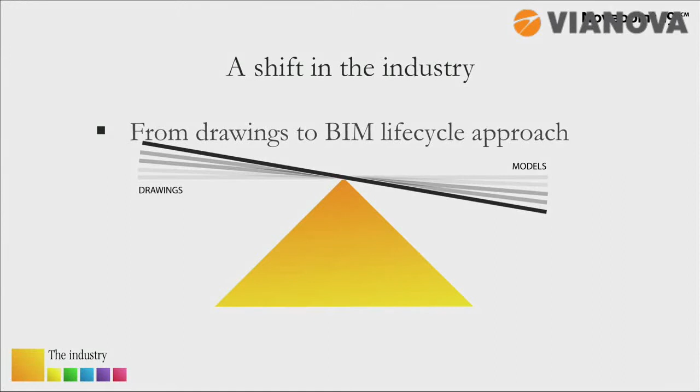Focus has been on 3D, but in a few cases also cost and time. The trend now is that clients start to ask for more models in a life cycle perspective. They want more information at object level. So, changes in the client procurement.

It's also very interesting to see that the client asks for models. More projects are now mainly delivered by models. This implies an increase in the need to support the BIM models. We have to find out who has done what, when, for example.

We also see that, now and in the future, open formats will be required from the clients. For some domains, we already see it.

Collaboration between stakeholders, we think that is a key factor now to have a shift in the industry. We have seen that we have it between domains, we have it between phases, and we even have it between stakeholders in the life cycle. We even see it between road and rail administration, and we find it very interesting.

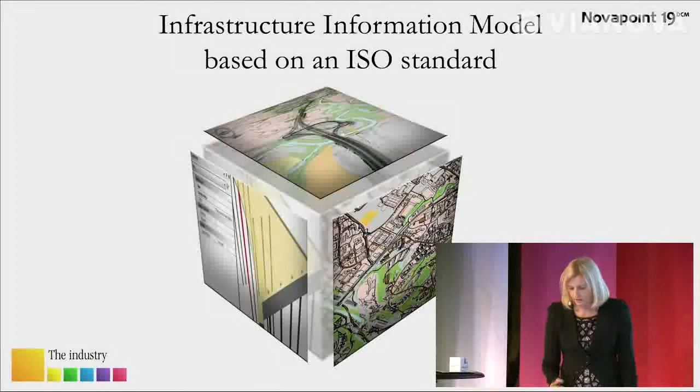If we first take the map and the GIS information, we can, for example, handle area information. If we continue with the terrain, the model can have much more detailed information about, e.g., the existing situation under and over the ground.

Then we have design information, and we have information around that. We have roads and structures with a level of detail that is ready for construction, with very good quality.

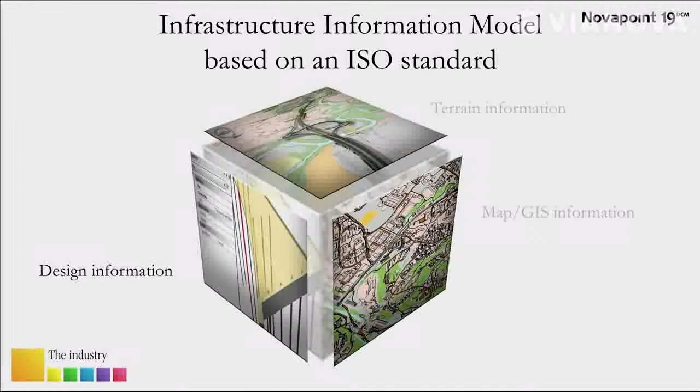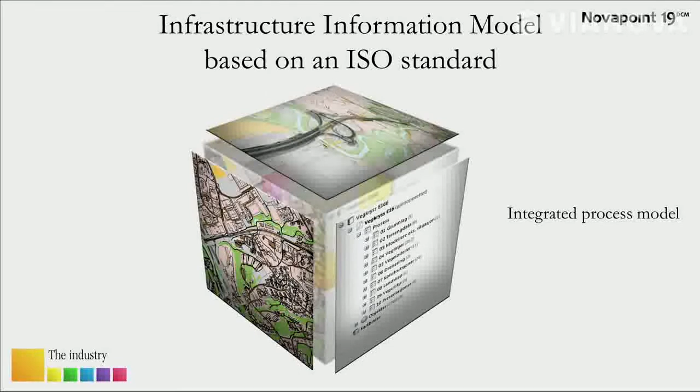So, in the end, we now have support for an integrated process model inside the solution. We can take care of planning, we can maintain, and we can quality assure the work processes. We think that is maybe the most unique part of our solution.

So, over to the product. We will guide you through the essential parts of the product.

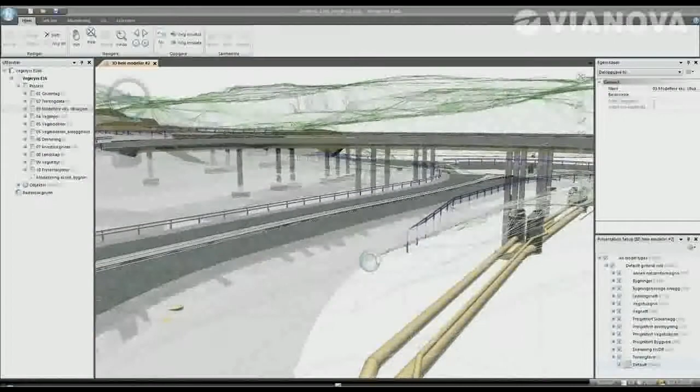With Novapoint 19, we have moved the work tasks into the common information model. That's quite a big change, a big step. Like this example from E16 in Sandvika, which has been worked on for a while, we can see that the task model up to the left has actually documented every change done to the model and how each object was created. Like this road, for instance, how was it calculated or imported?

When you start a new project, you will typically select from some templates. Here we select a standard of the process code in Norway, and then it establishes the task tree for you, which will, after that, record all you do with the model.

A big new thing is handling the CRS through the whole system, from beginning to end. You typically start up with one of the templates we have in the system. We support all the UTM, NTM, SWEREF, etc. So you set the CRS for the system.

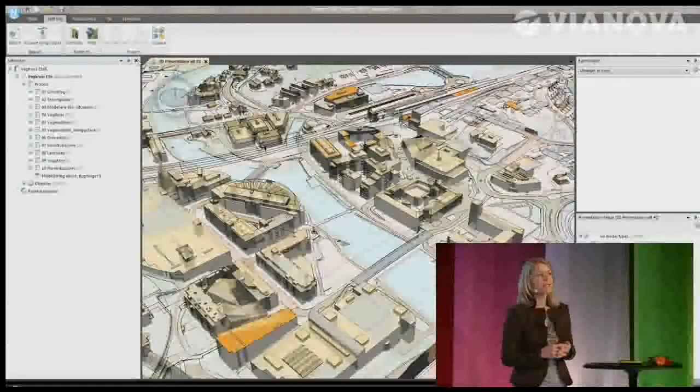When you enter a model, you can always go into the general property view and see what CRS is active in your model. We also have a validation during import of a file: is the file the same CRS as the model or not? If it's not, select from a transformation library.

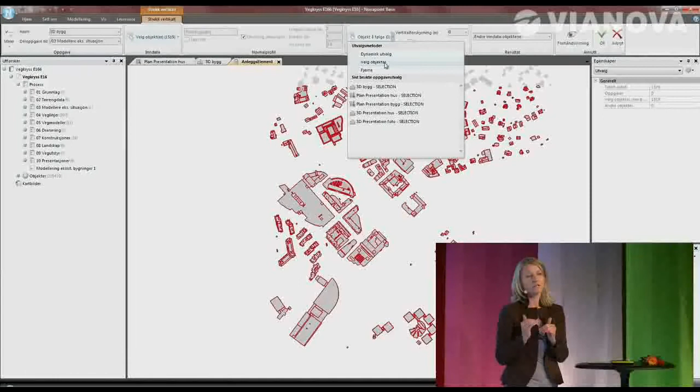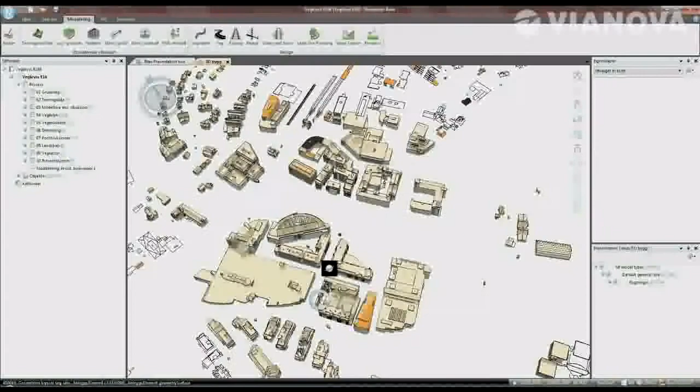Existing infrastructure: we get a lot of our information in the beginning from maps today. Here we have imported a map with some buildings, but we want the buildings raised to 3D. So I select a set of buildings, and I select to which level or surface I want them extruded. Then the system calculates a volume for all the selected trees and houses. Because of the quality of the map file, you see it's quite a good recognition of where you are, so it's a good start when you start designing in a city, for instance. It's only based on map data.

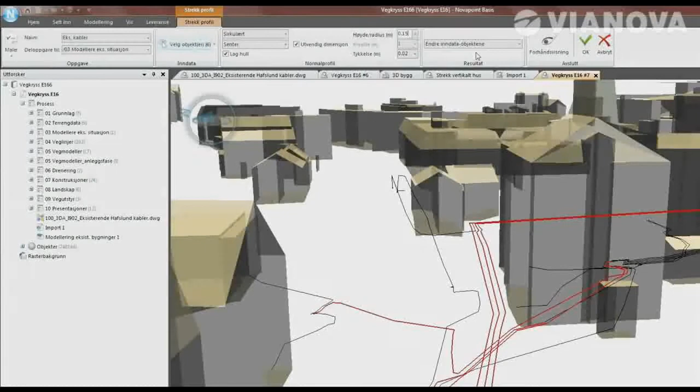You always get a lot of existing infrastructure as only lines or points. Here we want to extrude a cable pipe around a cable that is only a line. So I select a set of cables from my integrated 3D view. I see them get selected, they're red, so I know I have the correct objects. Then I select a shape for the extrude - circular, square, dimension, diameter, and so on. The volume is then calculated and extruded and stored to the model for all these cables.

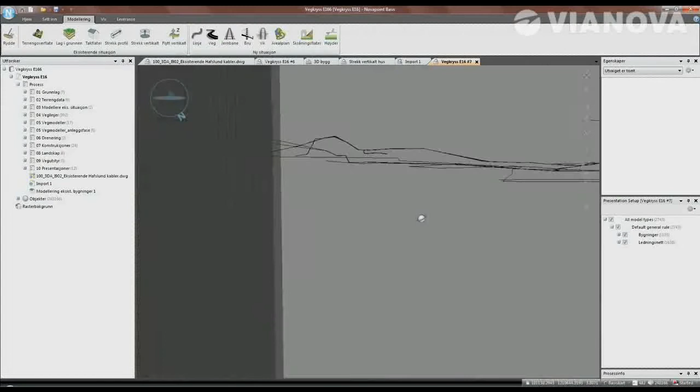Here I selected some cables, but I could have selected the object cable for the whole model and then run extrude just once as one task for the whole model.

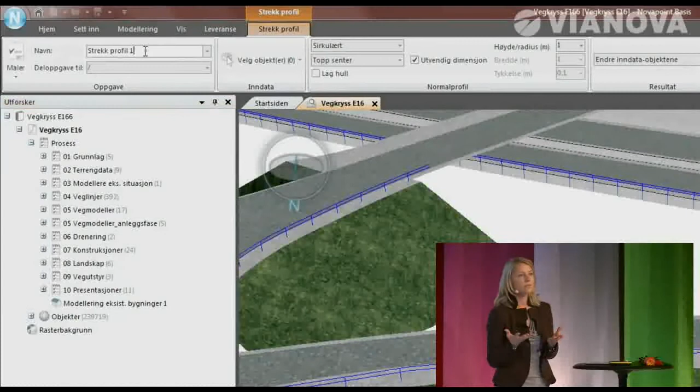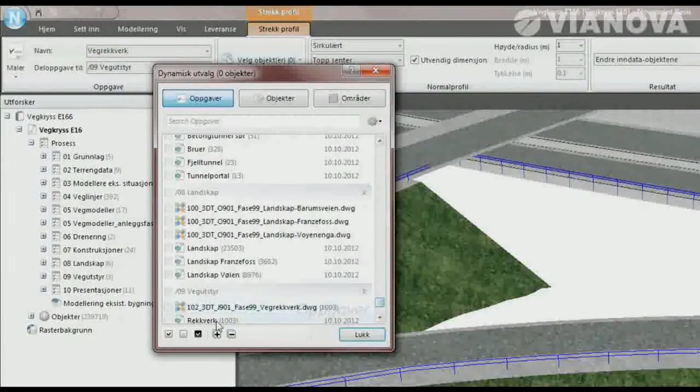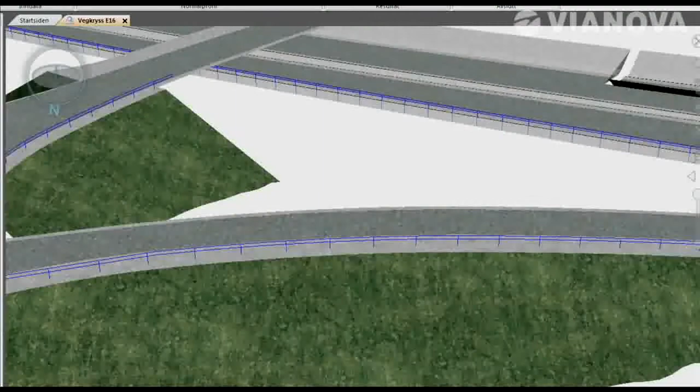Another example: maybe you get design data from someone else only as lines, and you want them as volumes too. Here we have a set of safety barriers which came in with an import from a DWG. So now I use a selection based on the import task. When I select that, I see the safety barriers marked red in the model - correct objects. Once again, I select the shape for the extrude, the dimension, if I want it massive or as a pipe or a hole. Then the volume is created and stored to the model, giving a better view of the end result.

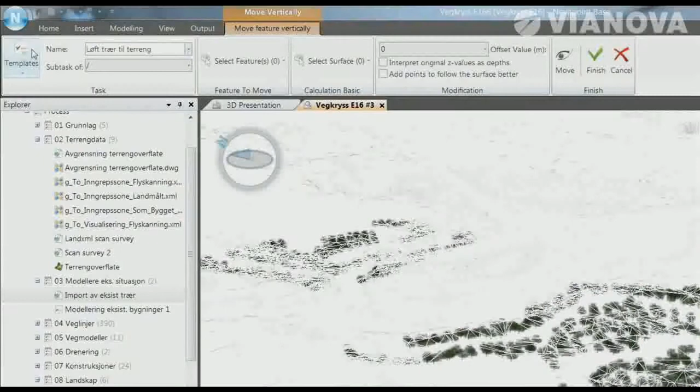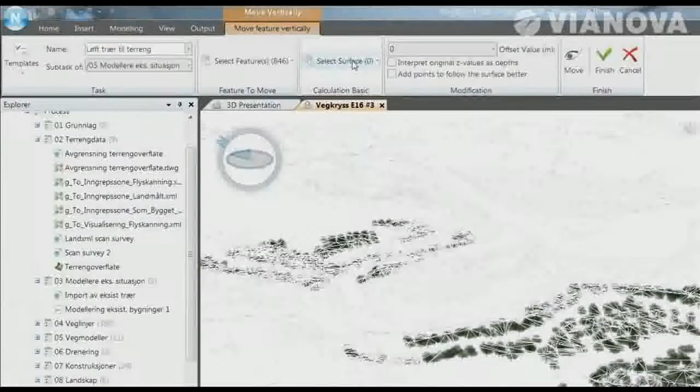Another typical situation is having a lot of 2D information, 2D points, and wanting them to get a Z value. Here we have a set of trees that should be kept through the whole construction phase, so I want them visible in my information model. I select the actual trees using the task selection again, and tell the system - you see them get marked red, you're in control. I say to which surface or level I want to raise these, selecting the top terrain surface, natural, with an offset of 0, and the trees are moved up to the terrain top surface, so they get a Z value.

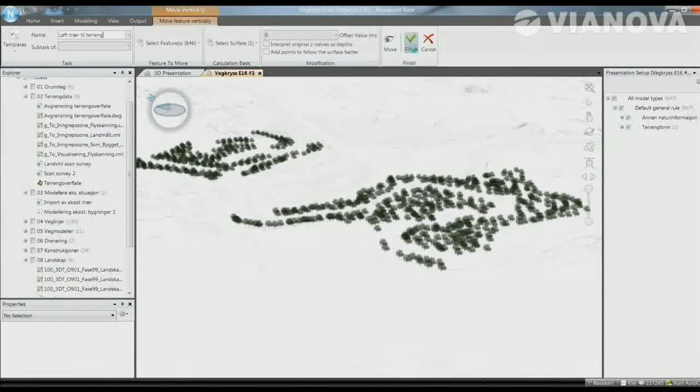You can always go and control this afterwards in the integrated 3D window, and it seems like they ended up where they're supposed to.

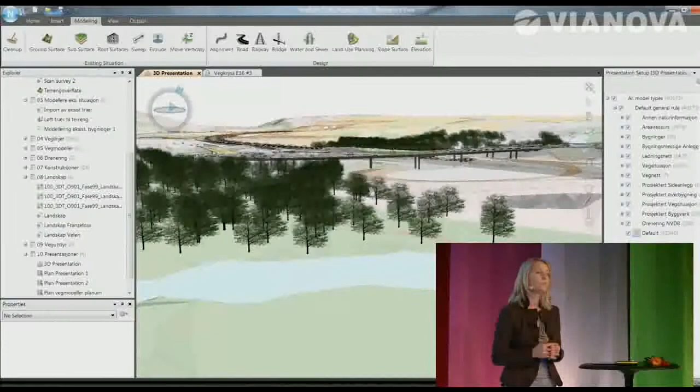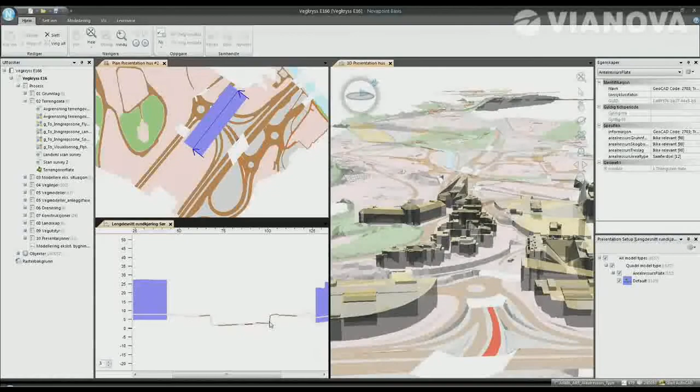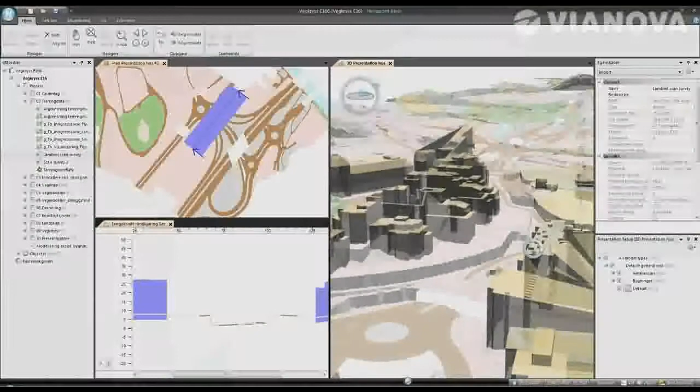We have multiple ways of adding terrain to the model. Here we have imported a land XML TIN file, but with land cover use. When you click on the different areas in the cross-section window, you see they get selected also in the other dynamic views, and all the information about the area is in the property view. So they all came in - all the information came in during import and was stored to the object. Together with the 3D buildings and the terrain with area information, it's a good recognition, a good start to go on for your further design.

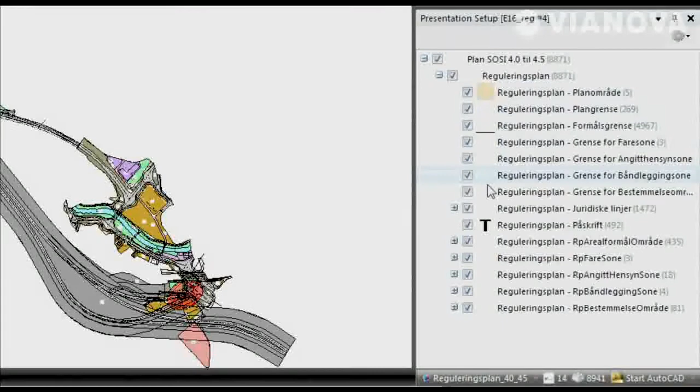Novapoint land use planning now stores data directly to the information model. That means the land use information is available for all other domains, all other users of the information model through the whole project. They could always go and click on an area and get all the information about the land use up in the general property window.

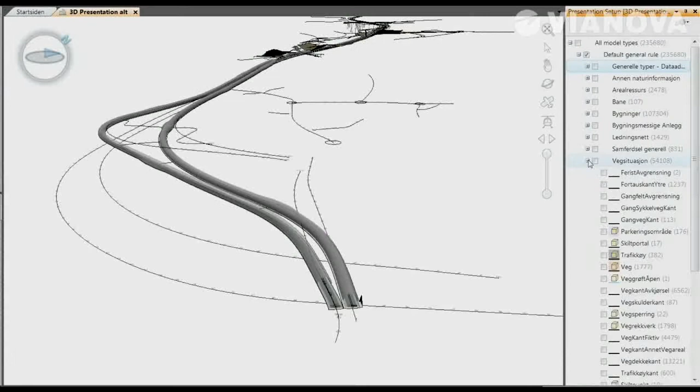To summarize: all this GIS, all these tools to enrich existing infrastructure models gives a head start for the designer to go on with his further design. Like this example from E16 Sandvika, where the road designer has just started on his actual road design.

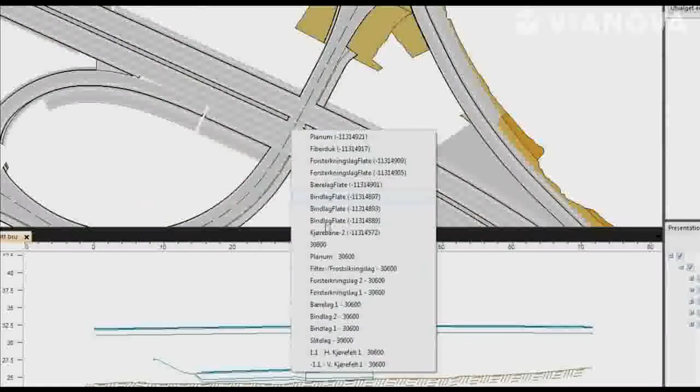A typical object that changes a lot in the beginning is the alignment. You could always click on an alignment and get all the geometric information. All the parameters are available inside the property view.

If you want to go and make changes to the geometry of the alignment, you do that in the same windows as earlier, same dialogues. You enter new parameters and the preview shows the changes so you see how the alignment becomes.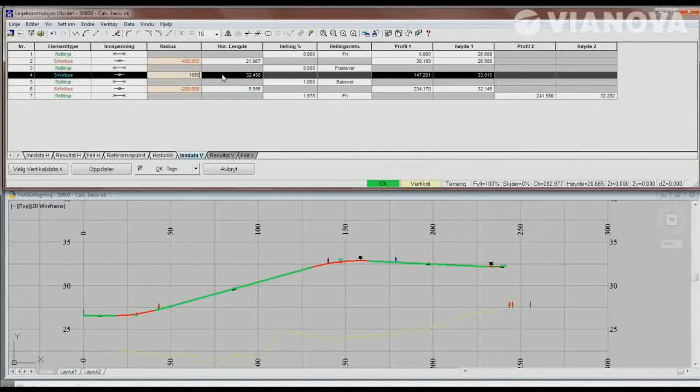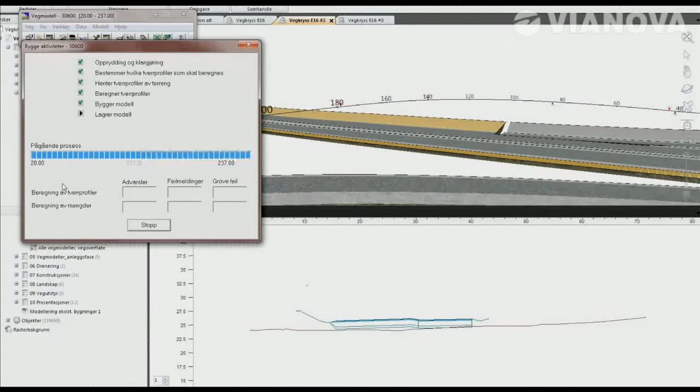The big difference is maybe that the calculated line is instantly stored and shown in all the dynamic views inside Novapoint. So now the alignment is a bit underneath the road, so I want to go and recalculate the road model. The recalculation then removes the former stored road and automatically stores the new calculated road to the model, so that you see it updated at once.

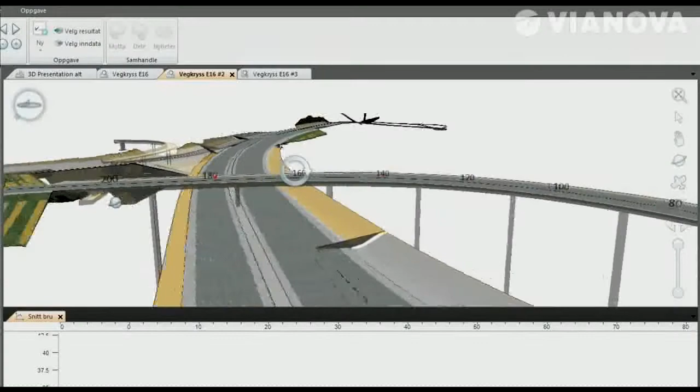Then it's easy to go and look at some different domains like bridge, piles, etc. in the area to see if there are any conflicts or if the bridge and the road fit well together. You also see the section numbering in the 3D window that gives you an overview of where you are.

Then to the Quadri Cloud. Now you are in charge of your model data. You can share it with any other user of the information model at any time, and you could download all the other ones' data.

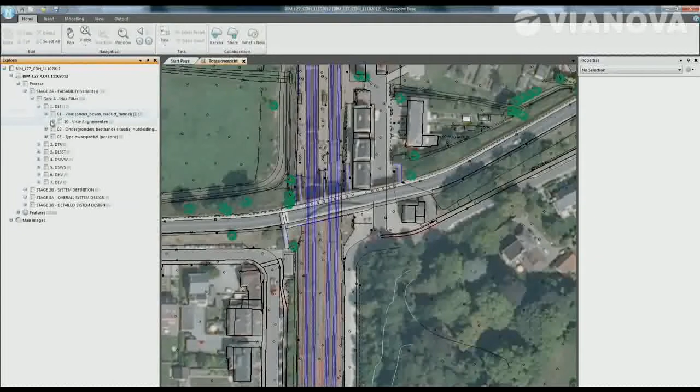Here, my colleague in Belgium is doing some changes on his railway. He wants to share that with me, so he hits the share button on the Quadri Cloud. He writes a small description of what changes, which object he has made changes on.

That is practical because you also have a button in the Quadri Cloud that says, what's new? So everyone of you could click the what's new button during your day and see if some of your colleagues have done changes to the model that you need for your further calculation.

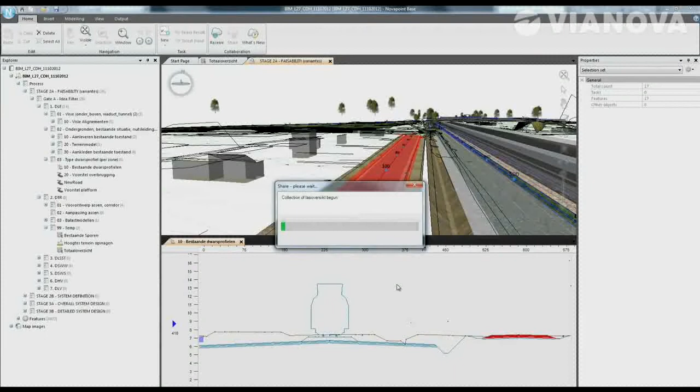So then you will get a list of all the changes, and you can choose to download if it's necessary for you, or you could wait till there are updates that you are dependent on. Now I log into the server back home, the same model server. I choose the same project, and I choose to download the whole project from Quadri Cloud.

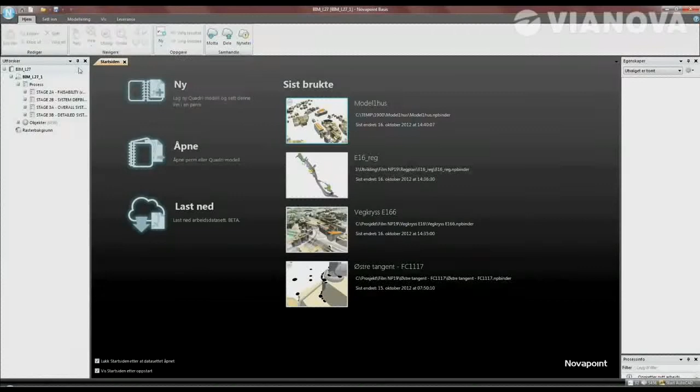I will see then that I get the exact same model as he has. I could have selected only some of the objects if I just needed some of them, but now I took all of it. And here we see the same task model as he had up to the left.

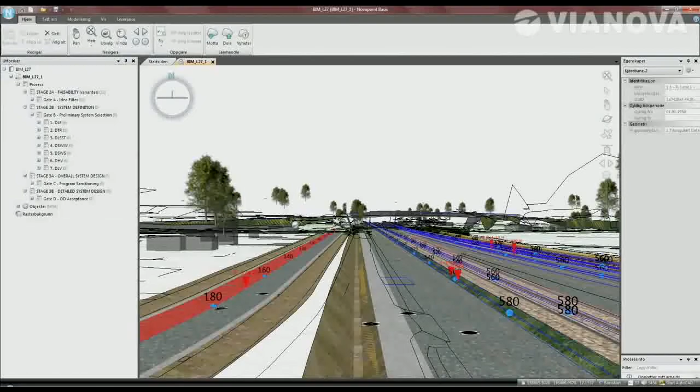This is maybe one of the biggest benefits with the task model, because it gives a great overview of what all of your other colleagues have done of changes to the common information model, because it documents every change. So it's a good way of following up the project, the common project.

If I want to do changes here, I can do changes, hit the share button, and then it's updated for my colleague in Belgium.

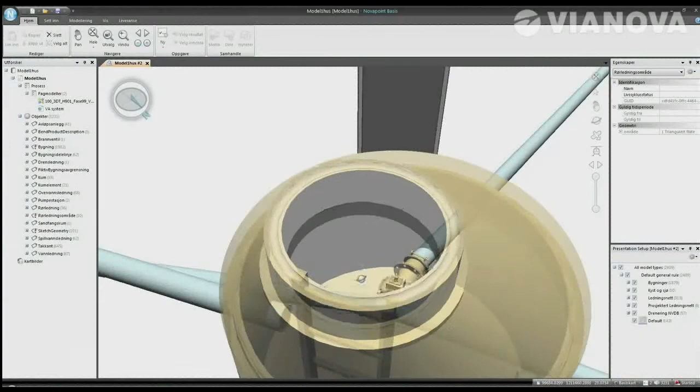It's important to be able to get information into the model. You create objects and you add intelligence on the way in.

Like this manhole imported from the Novapoint Water and Sewer Library, it is now divided into different objects. The dividing of them into objects is done during the conversion of the file when you import it.

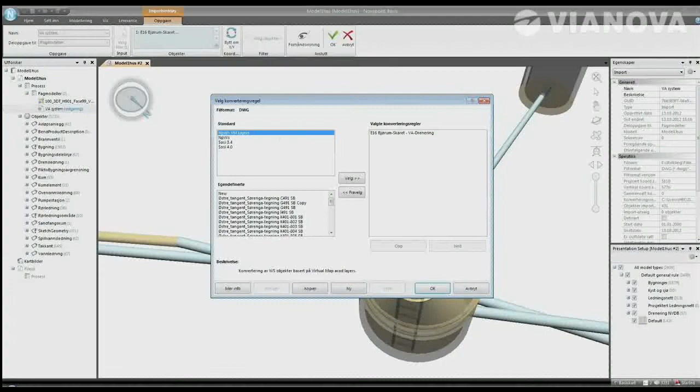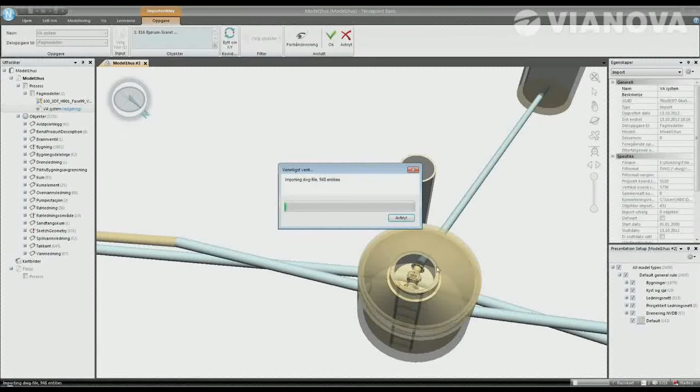Here is a conversion file based on import from DWG. So I have mapped from a layer name in DWG until a given object inside Novapoint. But you could actually also map from a given layer name to the object manhole with the property value concrete on material. So it's not just to an object, but to an object with more information.

And then it's data out from the system. You could, of course, always draw all your views in the model to AutoCAD, for instance with standard map drawing rules, as you used to today. You can select from the different windows you have defined inside the model from the standard Novapoint menu.

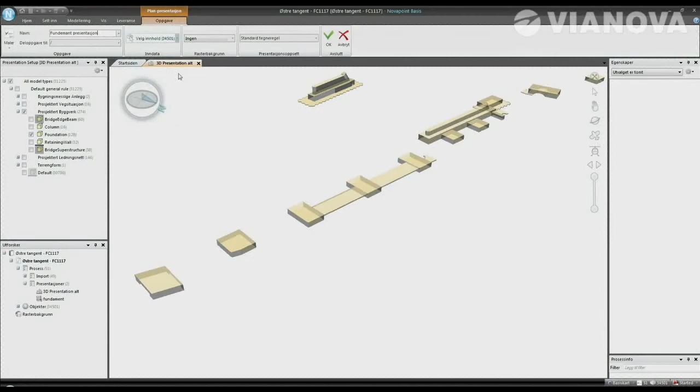You could also easily isolate which objects you want to have in one separate drawing, so you don't have to remember which file the object came from. You just select objects, like here, fundaments, from the general model, and export it to DWG.

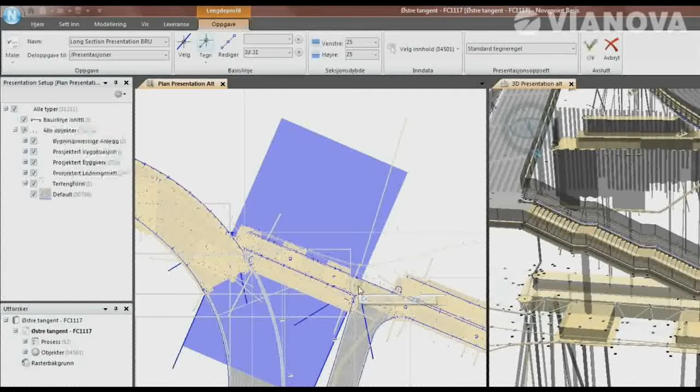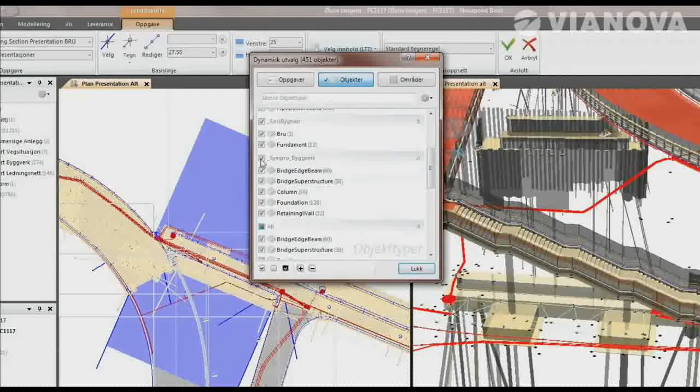So when you are selecting objects, you could also always have these dynamic views open, like the long section window. You could either select to have a long section along a given line, or you can draw a line for the long section. It's always shown in the plan view where your section is. You could choose to show all of it, or go into the selection dialog and choose to only see certain objects. You see that it gets marked red when I select each new object. This long section cuts through volume objects, surfaces, lines, so you'll have everything in your long section.

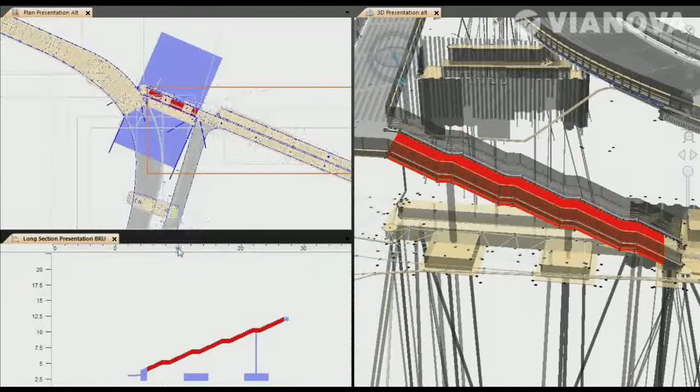Then finally you choose a drawing rule, which also will be the drawing rule for the DWG if you draw it to AutoCAD. Once again, when you select an object in one dynamic window, it's selected in all the other windows, so you're in full control of the model. Draw it to AutoCAD in plan or in 3D, or you could, of course, also keep it in the model longer because you have a good overview of your project, both in 3D and cross-section.

So, to the benefits. What benefits do we have using this infrastructure information model? What's in it for the planner?

We have improved communication with stakeholders, because we communicate through models. On the other hand, we also have shorter decision making because everybody understands what they decide.

And for the designer, we have better communication between different domains. We have access to information and design data at object level. And we have also the possibility to support the work processes for the different companies.

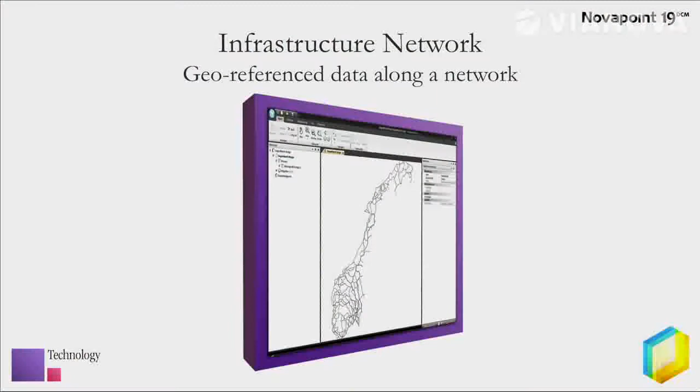The third big component is, of course, the object model, based on an ISO standard. Today, at the moment, there are 1,150 objects inside this model.

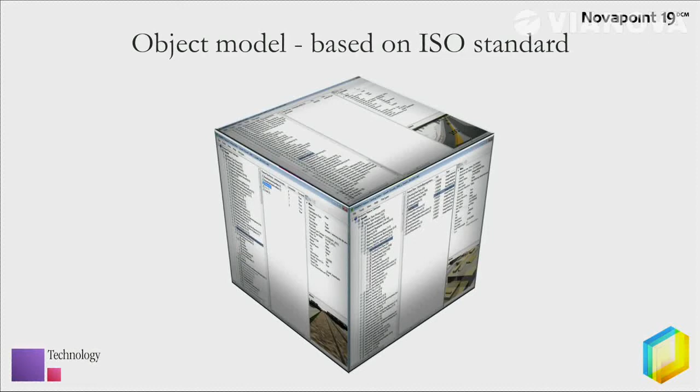These objects were defined looking at and harmonizing towards map objects, water and sewer map objects under a new standard there, CityGML, and also land use and land cover from the INSPIRE directive, European. And of course, we have created a lot of new objects where we couldn't find objects in any existing standards.

But we really believe that this model is so open and flexible that it will be easy to extend it with new objects that will be necessary in the future.

So what does it mean to be based on the ISO standard TC211? It means that you get some guidelines for how you build up, for instance, a feature catalog, how you position your objects, how to handle time. And it also means that the model is GML compatible.

So data modeled in Novapoint 19 could be exchanged with other systems that are based on the same standard, for instance, using GML as a model exchange format.

So the most important thing, the end users. It's all about human. Can we together move the industry? We have said that it's 20% technology and 80% human. I don't know what the future is about, but maybe it's 30-70, I don't know.

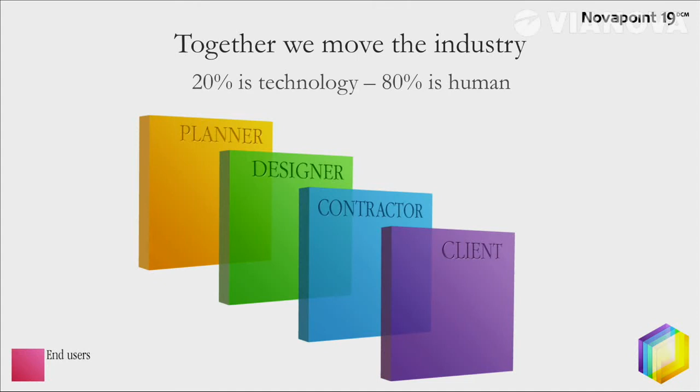But the most important thing is that we can't change the industry before the designer has all their domains inside the model, and before we have project managers who dare to take the risk and go into this model. So we think it's very important that everybody understands that they have to take the step.

So how can we move? What's in it for us? We have a true model which says that what you see is what I get.

The model is in your hand. You are the one who has the knowledge about your domain. Keep it. Don't deliver it to the 3D department. We don't believe in that. We think that you are the one who knows what to do, and you have to follow the project to the end.

Your data is more important than ever. We create the object once, and it will live for a whole life cycle. That is really fantastic.

So, in the end, we think that you shouldn't use time on administration and files. Use your creativity and innovation, because that is needed in our industry.

BIM for infrastructure is for you now, for everybody, not some special persons.